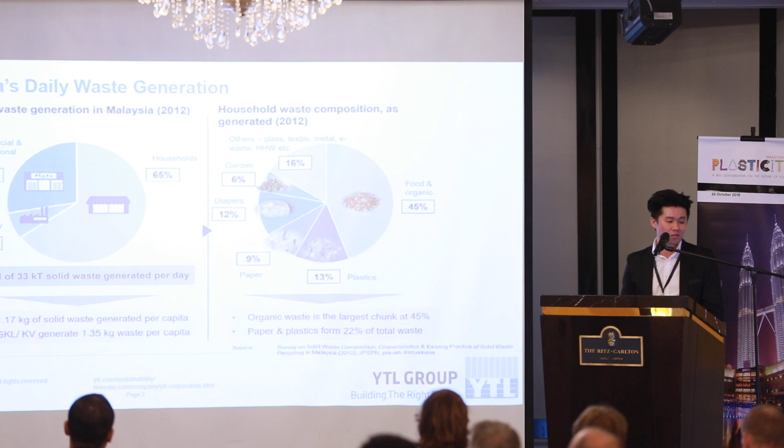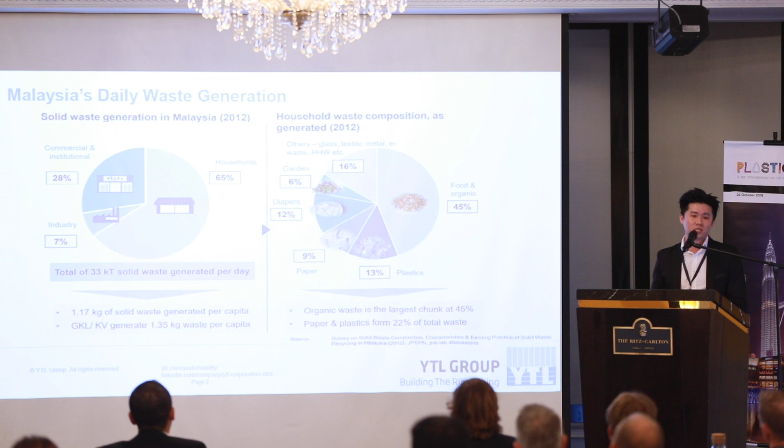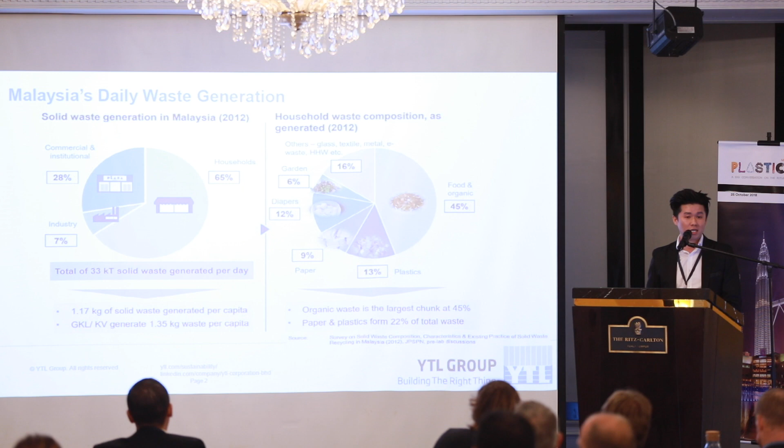Before we go further, I'd like to share some data and stats of where we stand currently. Malaysia currently generates about 33,000 tons of solid waste every day, and this data is from 2012. But the latest figure I got is from 2017, where we currently generate about 38,000 tons of solid waste every day. Scary, isn't it? So I want to point out how we can make use of this waste to co-process in cement.

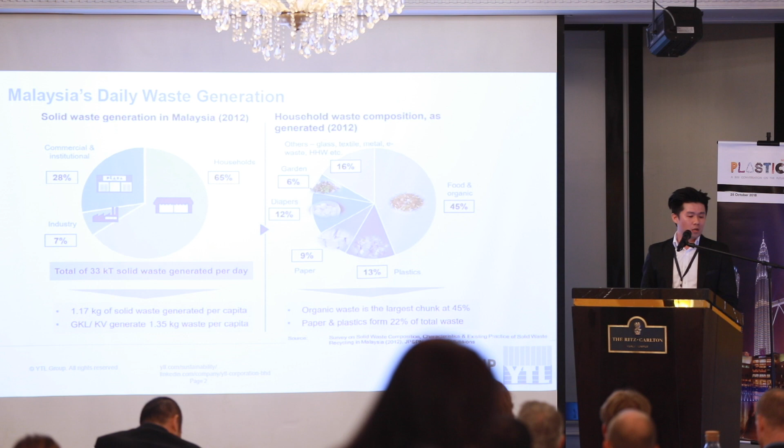If you can see, organic waste is forever the highest one, forming 45% of this pie chart, and plastic forms 13%.

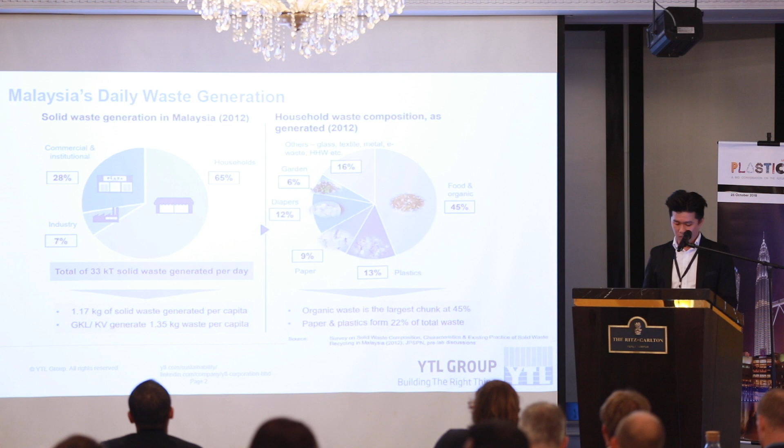As per 2017, the recycling rate in Malaysia stood at 17.5%. If we look at the metric tons we generate every day for plastic, it's about 2,850 metric tons every day. So this is a huge number.

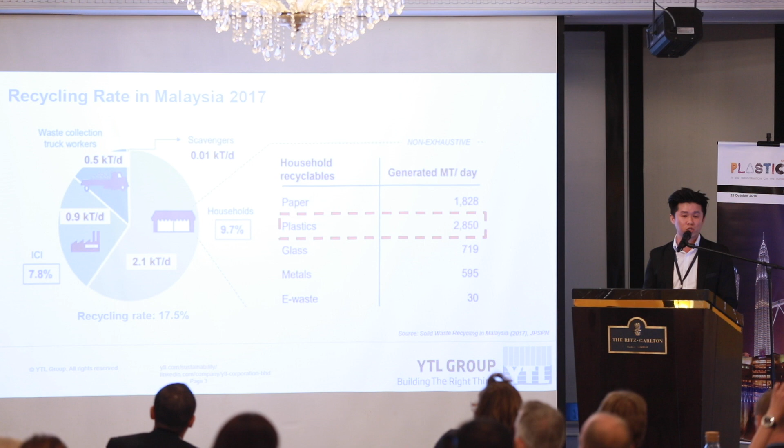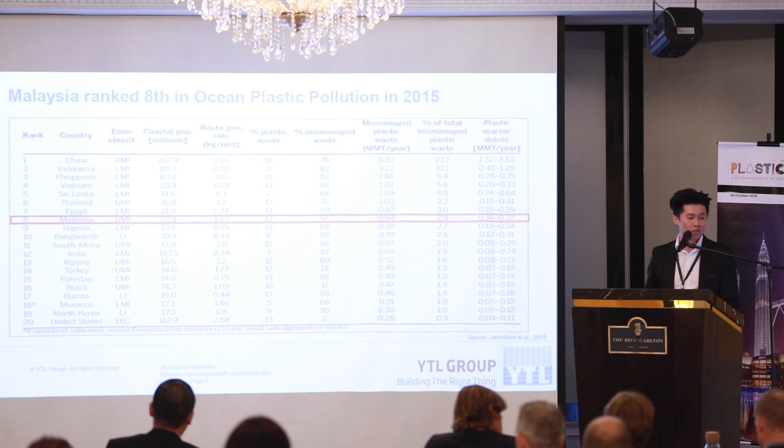I want to show you this table. This is not something we should be proud of, but Malaysia ranked number 8 in ocean plastic pollution in 2015. If you see the waste generation rate in kg per capita, it's actually 1.5, which is much higher than the top 3 countries in this table.

We face different challenges in addressing plastic pollution, some of which have been mentioned by previous speakers. I want to point out that humans are the main generator, or I call it the top culprit. We contribute to plastic pollution, be it on land or in the ocean.

So why is it? I guess maybe we have low awareness towards environmental issues. People tend to think this is not something very important, so they take it lightly. And attitude—in Malaysia we have had so much awareness programs and initiatives for the last 10 years, but it's very hard to change, especially when it comes to segregation at source. Even at the federal or state level, the government has been promoting this, but the results weren't really fantastic.

Another issue, enforcement, I think is most critical. People tend not to be afraid when there's no bold enforcement taking place. And to business owners—I'm not saying all of them, but some—they tend to behave with this attitude of just doing enough to comply with regulations.

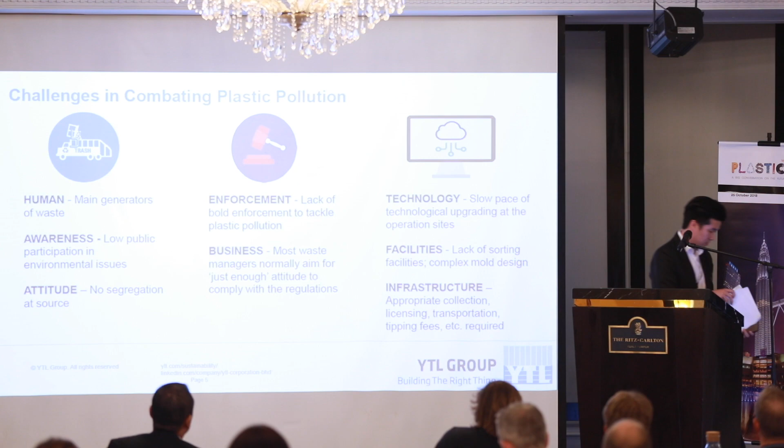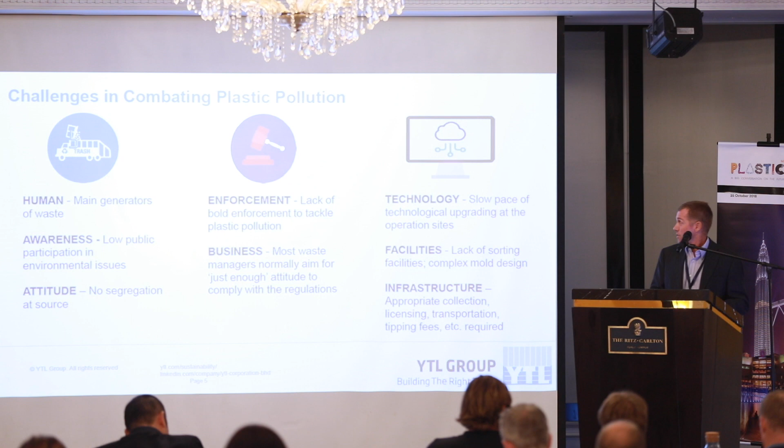Thanks, Isaac. Countries around the world have already implemented a plan for the cement industry to be part of the elimination of waste that is basically at end of life, with no further uses for that waste. The ideas we've seen here today are incredible—turning it into new products, recycling, upcycling, and of course into a type of biofuel as well. Germany, UK, and of course India has recently, in 2017, put together a plan for waste being put into cement kilns. So it's become an accepted form of elimination of end-of-life waste.

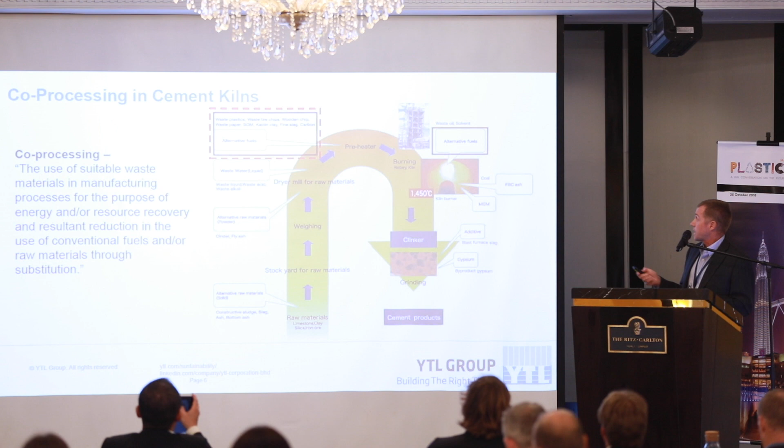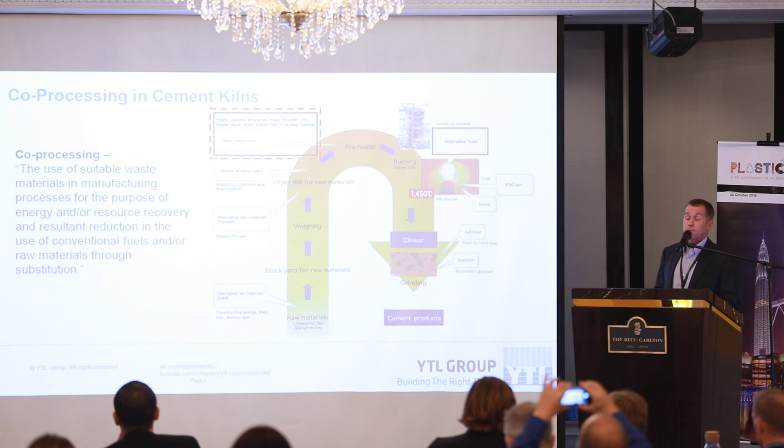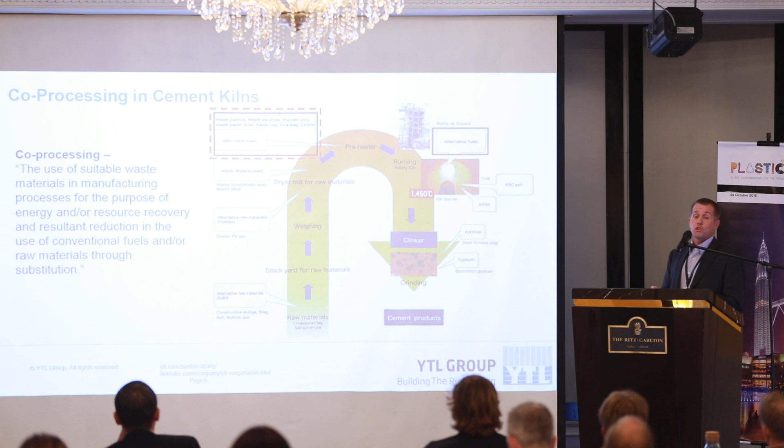Co-processing in cement kilns can be put in at several different stages: the preheater, the calciner, the main burner, and of course the blending stage as well. This accounts for all sorts of products like fly ash, plastic waste, and gypsum. Different temperatures at different levels—the preheater has a lower temperature, then the main kiln, which is over 1,400 degrees, very high temperatures to eliminate dioxins and other harmful chemicals like furans.

Those types of chemicals cannot be eliminated through incinerators, and they certainly leach into landfill sites—so the leachate from landfill sites still contains dioxins and some chlorides as well. Hazardous waste, for instance hospital waste, municipal solid waste that has been incinerated—the ash derived from that in China and Japan is also classified as hazardous waste, and you get a tipping fee for incinerating further the ash from a municipal solid waste incinerator in a cement kiln, because it basically eliminates all the dioxins and other harmful toxic substances.

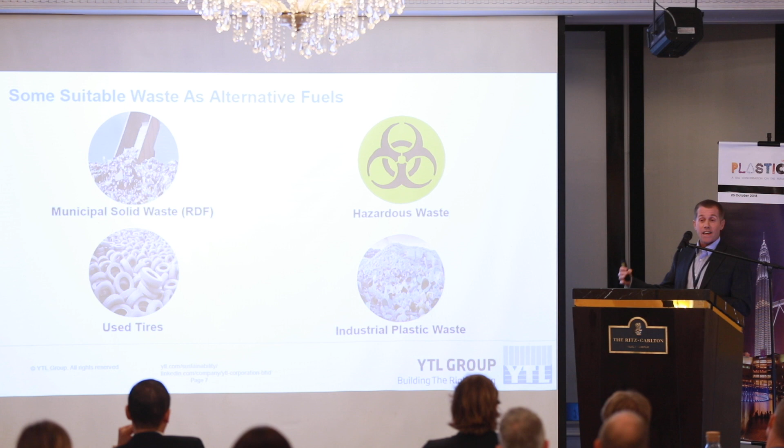Airline trans-border waste carried by airlines from one country into another is also considered a hazardous waste. So there are numerous areas where hospitals, airlines, and other types of waste need to be completely eliminated.

Municipal solid waste can be processed further into RDF, refuse-derived fuel, or even PEF, processed engineered fuel. Used tires, which we've been using in our cement plant as an alternative fuel, but also eliminating a source of waste, basically end of life, because it's very difficult to devulcanize rubber, even though it's been tried on a good scale here in Malaysia.

It is incredibly difficult, and it's a chemical process which requires a lot of energy as well. Industrial plastic waste, consistent type of substance which is easily fed into a cement kiln, so long as the chlorides are not high. So PVC, polyvinyl chloride, doesn't sit well in a cement kiln, but otherwise all other types of plastic waste can be burnt in a cement kiln.

Sorry, this is not working.

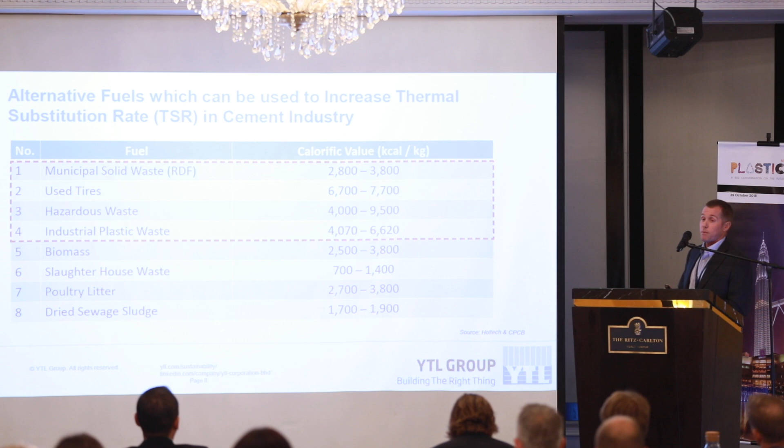And there's all types of other industrial waste. We don't use all of those, but we certainly use some of those in the cement kiln. And that reduces the carbon emissions because you're offsetting the fossil fuels and also burning a waste product in a controlled environment with particulate filters with a limited amount of particulates flowing into the environment.

Also for the slag cement, when you're actually blending cement, which YTL has been doing since '97, you're talking about fly ash, blast furnace slag, copper slag being used. We don't call them waste products, but they're byproducts from different industries. So they can be used in the cement industry to enhance the strength of cement.

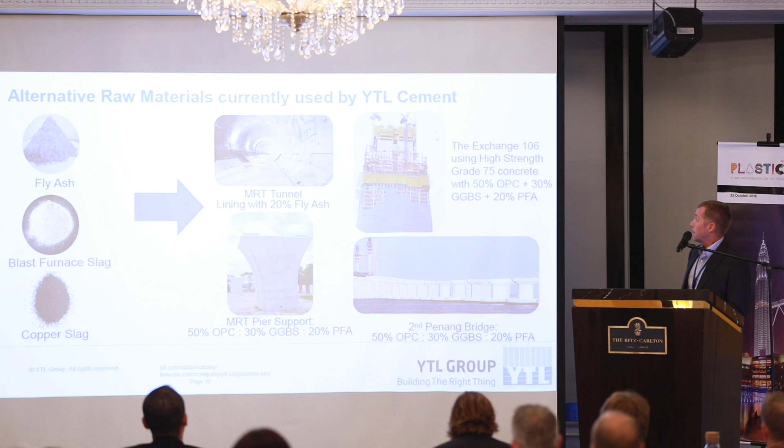And these have been used in a number of different projects, Sentosa Resorts World, the TRX project, the Twin Towers, very many projects for very solid foundations, hard setting concrete. And of course, these are the examples that YTL has used directly, MRT Tunnel, Penang Bridge, and of course, the TRX main tower.

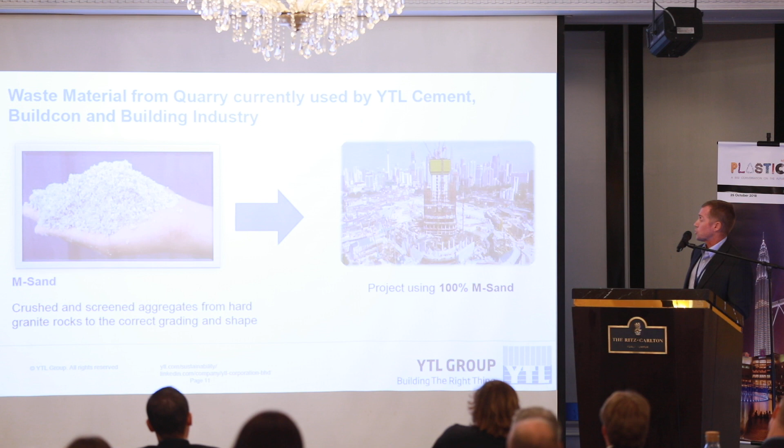And of course, M-sand, it's not a byproduct of an industrial process, but it's a byproduct of a quarry that can be used, and that's also been used for the TRX. 100% of M-sand was used in that project for the main tower at the TRX project. So that is also what would be a waste product converted into a substrate for concrete.

And then waste heat recovery, this is not dealing with a solid or liquid waste, but certainly this deals with another waste product. So we have a China plant which produces about 8 or 9 megawatts of power from waste heat. And in Malaysia, we've now got a plant which is about 9.5 megawatts from waste heat.

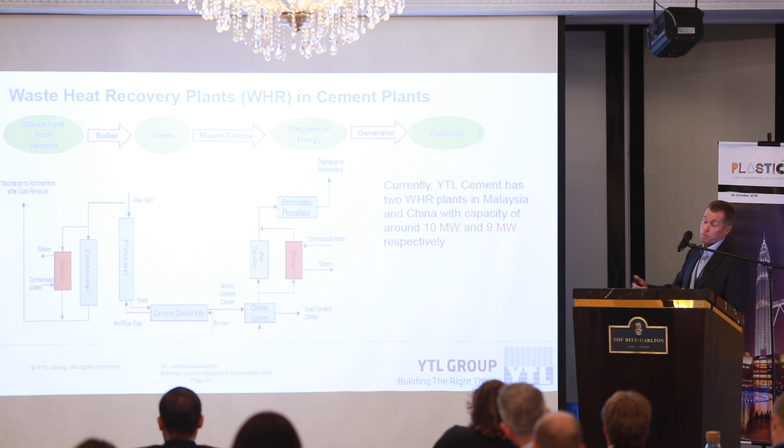So again, that would have been burnt in the environment with no productive use, but a Danish company has now come out with a drying process using the waste heat from cement kilns as well to prepare other fuels from the municipal solid waste stream for an alternative fuel for cement plants.

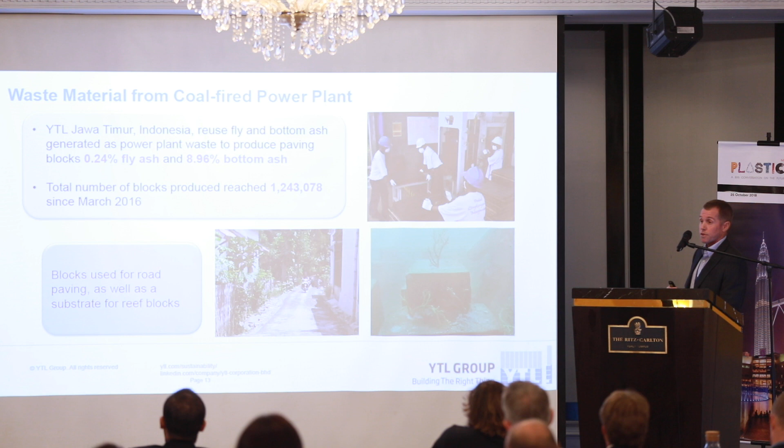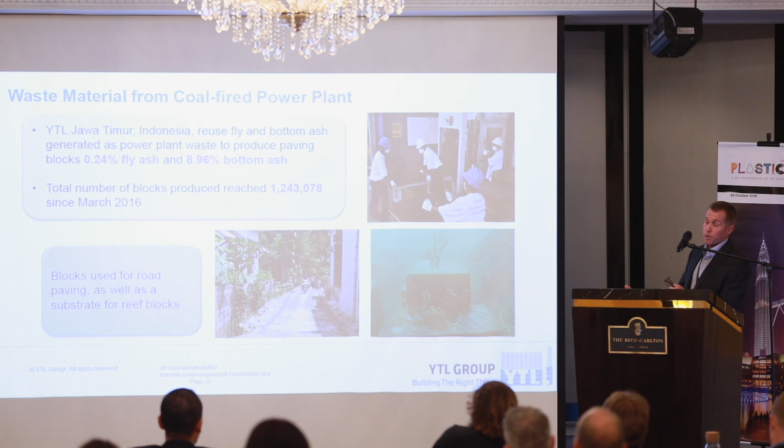And of course, coal-fired power plants, that's where the fly ash and bottom ash come from, so there's further uses for those as well. And I think that in this case, fly ash we buy from Tenaga Nasional in Malaysia. Again, that would have normally been landfilled, but we divert from a landfill.

So what is the circular economy in terms of what YTL has experienced? Wessex Water has a subsidiary called GENeco in the UK. So we collect food waste, about 45,000 tons a year.

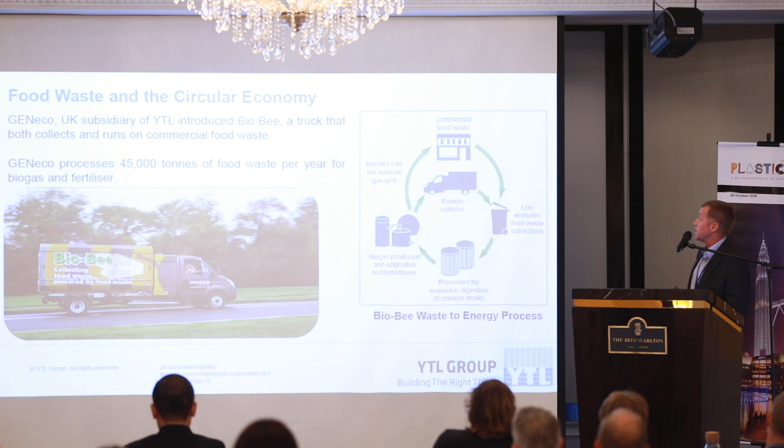And that food waste is then digested in an anaerobic digestion facility, producing biomethane. Biomethane is used then to run the trucks that collect the food waste. So this is a good example of a very strong circular economy model where food waste, which as you probably know represents about 30% of the waste that normally comes from supermarkets or restaurants and homes, again is recycled into reusable product in terms of energy.

And of course, plastic waste is not just limited to the areas we've seen so far, but we've heard about the EcoARK in Taiwan earlier from MiniWiz, and the building blocks I think that Doug mentioned in South America. And of course, in UK, it's a substitute for making asphalt, instead of using bitumen at 10% substitution rate, you can use it at a much lower rate of about 1 or 2%. So a very strong substitute there as well.

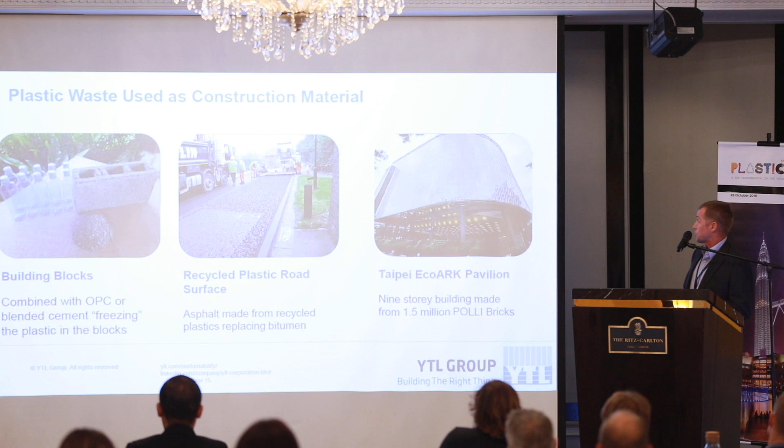So these are just the other examples. For our vision,

CO2, I know Doug says we should separate some of those. You know, CO2 is one issue, recycling is another, and of course, reducing dependence on fossil fuels is another area. But all these combine in the cement industry to create a circular economy and our vision for what we see as an outcome. Perhaps the model can be developed, but it has to be in cooperation with government. And the private sector is very keen to move forward on this. So I think it's a very strong potential for end-of-life products in this area.